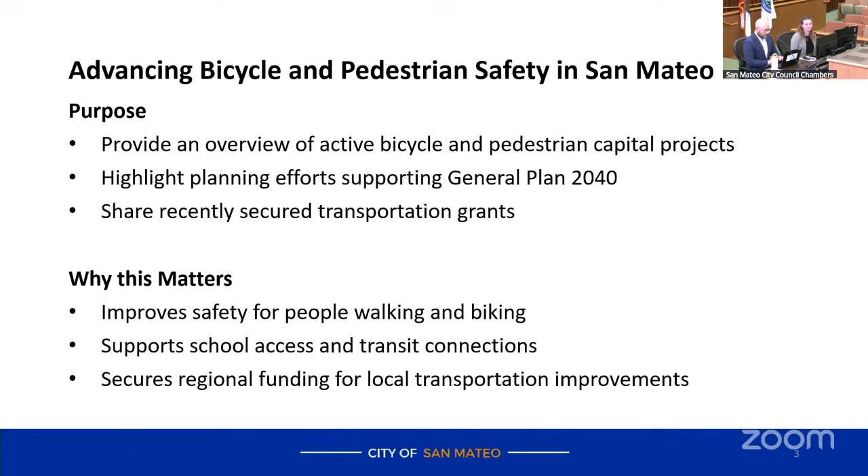First, I'm going to talk about a few of our guiding transportation plans. These really have a goal to reduce severe and fatal crashes while making streets safer and more comfortable for all types of users. These guiding transportation plans inform the city's major transportation capital improvement efforts.

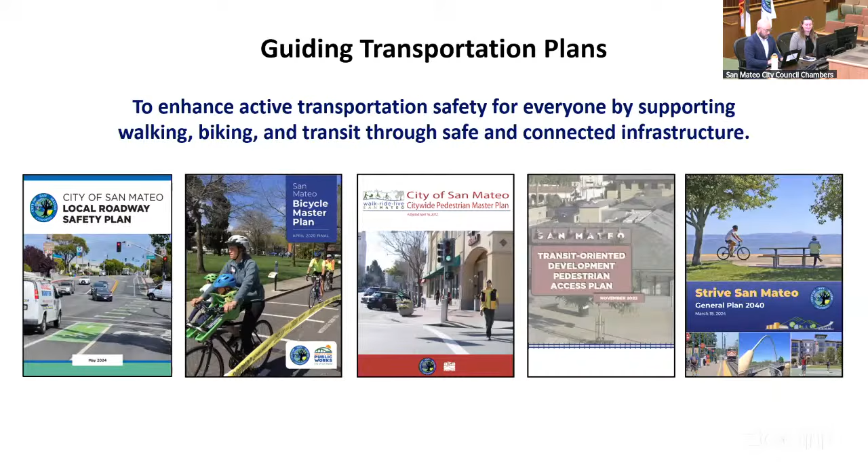Just to go over the ones we have on the screen here: the City of San Mateo Local Roadway Safety Plan, the Bicycle Master Plan, Citywide Pedestrian Master Plan, Transit-Oriented Development Pedestrian Access Plan, as well as the General Plan. Tonight we're really going to highlight the Local Roadway Safety Plan, or LRSP, which establishes a framework and process for identifying, analyzing, and prioritizing roadway safety, as well as the Bicycle Master Plan, which is a vision for expanding and improving the city's bicycle network.

For a little background, we're going to first go over types of bicycle facilities. Class 1 is a shared use path, off-street, designed for both bicyclists and pedestrians—a good example is the Bay Trail. Class 2 are on-street, where bicyclists ride adjacent to vehicles in a designated lane, considered a buffered bike lane if there's horizontal separation provided. An example in San Mateo is Saratoga Avenue.

Third will be bicycle boulevards. These are also on-street; bicyclists share lanes with vehicles, and they're implemented on low speed and low volume streets. They can include traffic calming elements. An example of this is 28th Avenue from Kyne to Saratoga.

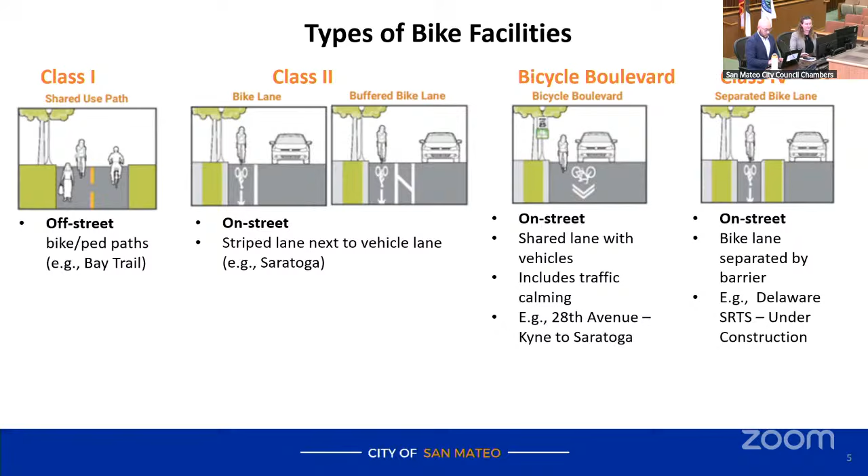And finally, a Class 4 separated bike lane. This is also on-street, but bicyclists are separated by a vertical protection, which could be a curb or flexible delineators. An example of this is the Delaware Safe Routes to School, which is under construction, and we'll talk more about in just a minute.

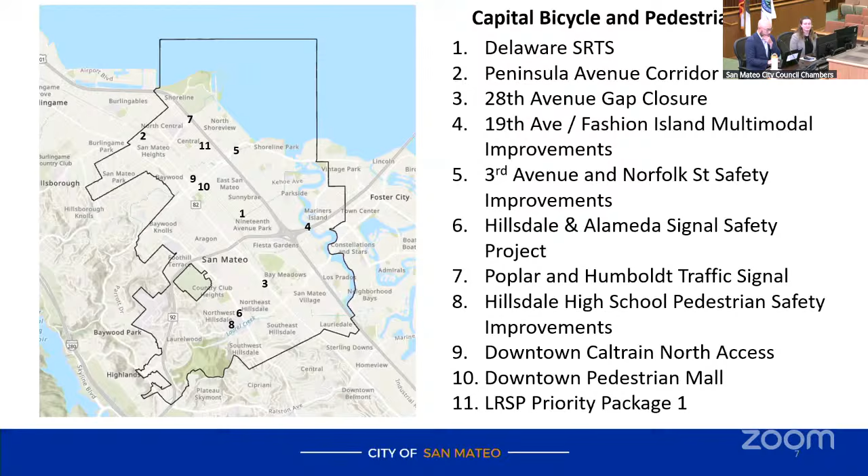Now we're going to move over to capital projects. This is a map overview of capital bicycle and pedestrian projects throughout the city, going from Delaware Safe Routes to School, Peninsula Avenue Corridor, 28th Avenue Gap Closure, 19th Avenue Fashion Island Multimodal Improvements, 3rd Avenue Norfolk street safety improvements, the Hillsdale and Alameda Signal Safety Project, Poplar and Humboldt traffic signal, the Hillsdale High School pedestrian safety improvements, the downtown Caltrain North Access Project, the downtown pedestrian mall, and the Local Roadway Safety priority package 1.

We're going to kick it off with the Delaware Street Safe Routes to School corridor. This goal here is to improve connectivity to existing bike facilities and pedestrian safety at crossings. It's a really key north-south connector for the city, with key access to the event center, Bay Meadows, the commercial corridor, and schools.

Funds were awarded by Cycle 5 of the California Transportation Commission's Active Transportation Program, which enabled the design and construction of a Class 4 separated bike lane and bicycle boulevard. The limits are Delaware Street from 19th Avenue to Pacific Boulevard. It's under City Council Priority A15, as well as high priority project number 55 under the 2020 Bicycle Master Plan.

Outreach was conducted for the project in April, May, and August of 2025 through two community meetings, and in May through a City Council study session and SMC Exposition and Fair Association Board. The design phase was completed in summer 2025, and most recently, Goodfellow Bros was selected as the contractor in late 2025 through a construction bid process. Construction is expected to begin in spring 2026 and be complete later this year.

Next, we're going to talk about pavement management projects that are in progress. I want to note this will be slightly different from before, as we first talk about in-progress projects and then move to completed projects.

First is the pavement management project 4A1. The project began in fall of 2025. It was suspended due to weather, and construction will be completed in late spring 2026.

Fifth Avenue from El Camino to Ellsworth Avenue, as well as Fifth Avenue from South Claremont Street to South Delaware Street, Laurel Avenue from 7th to 9th, 9th Avenue from South Humboldt to South Amphlett, Norfolk Street from Darwin Avenue to Roberta Drive, and Bridgepoint Parkway from Bridgepoint Circle to Bridgepoint Circle are all a Class 2 bike lane. Fifth Avenue is a high priority in the bike master plan, and the rest of the streets are part of our existing network.

A Class 2 buffered bike lane will be on Delaware Street from Birch to Sunnybrae Boulevard, a high priority in the bike master plan. A shared use path is medium to low priority on the bike master plan for Peninsula Avenue from Bayshore to Airport Boulevard. Next, PMP Phase 6B.

Construction is expected this fall. It's a Class 2 bike lane with a high priority in the bike master plan, on West 3rd Avenue from Dartmouth Road to El Camino Real. I have this highlighted over here on the map for 5th Avenue, 9th Avenue, Delaware, Laurel, 3rd Avenue, and 5th.

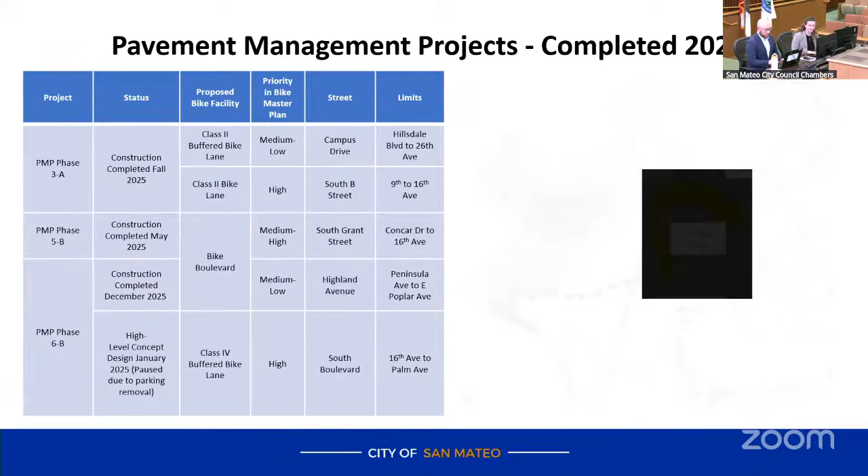Here are the pavement management projects completed in 2025: PMP Phase 3A, 5B, and 6B. Construction was completed in fall 2025 for PMP Phase 3A. For Campus Drive from Hillsdale Boulevard to 26th Avenue, it is a Class 2 buffered bike lane with a medium-low priority in the bike master plan. On South B Street from 9th to 16th Avenue, this is a high priority and it is a Class 2 bike lane.

For Phase 5B, construction was completed in May of 2025. It's a bike boulevard with a medium-high priority in the bike master plan, on South Grant Street from Concar to 16th Avenue. For PMP Phase 6B, construction was completed in December 2025. It has a medium-low priority in the bike master plan, on Highland Avenue from Peninsula Ave to East Poplar Ave.

And finally, the Class 4 buffered bike lane on South Boulevard was paused due to parking removal. There was a high-level concept design in January 2025, but over 20 spaces for parking were expected to be removed, so staff has put this on pause until more expansive outreach can be completed.

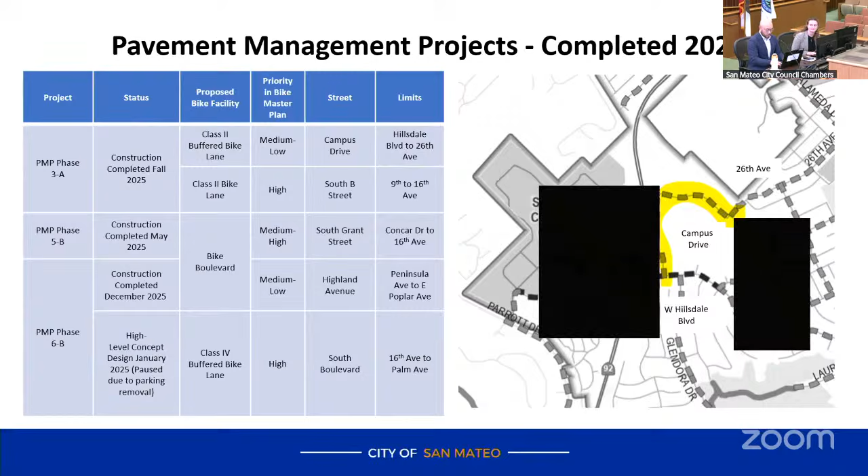Here is Campus Drive, as well as South B Street and South Grant Street for these projects, and Highland Avenue.

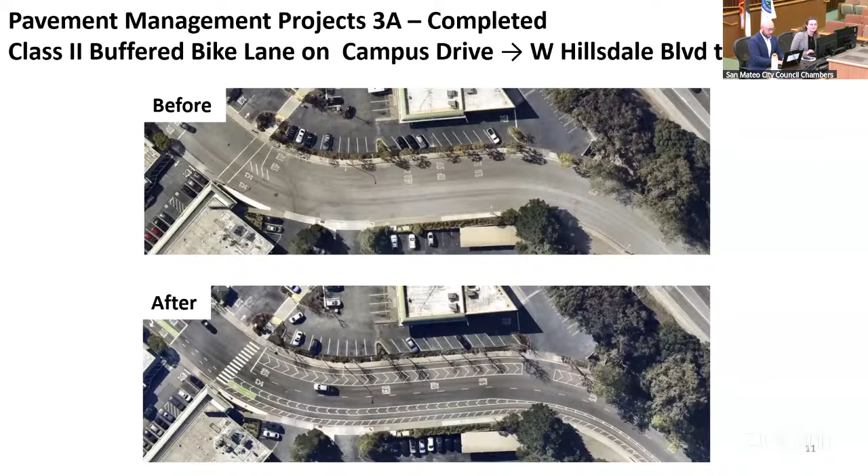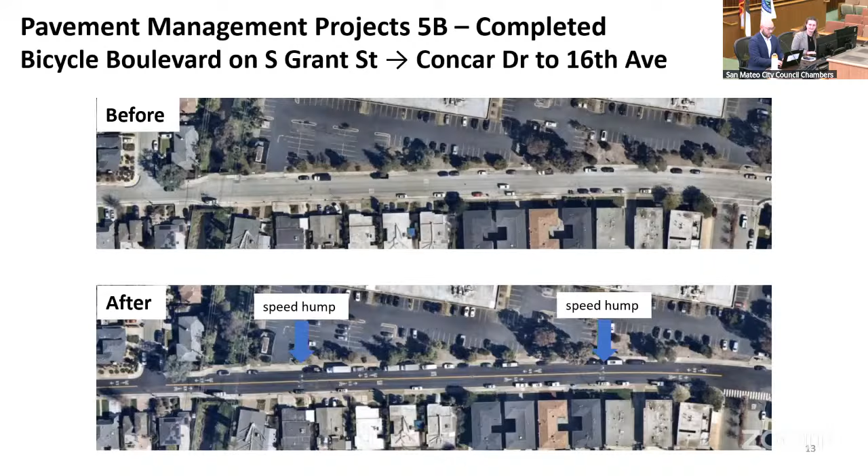Next, we are going to talk about the Peninsula Avenue corridor improvements. Short term, the goal is to refresh roadway markings. Medium term, to work on the Delaware Avenue traffic signal modification project. And long term, to work on the Peninsula Corridor Complete Streets Plan.

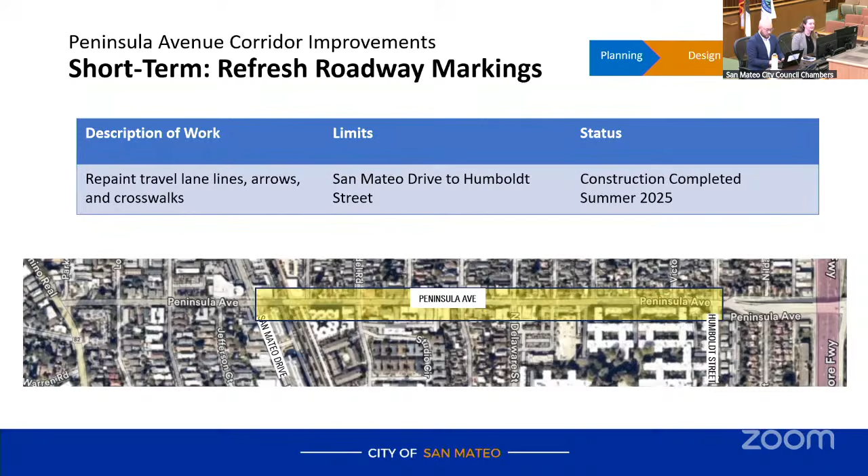The goal here is to improve the corridor across all modes. First, starting with the short term, we'll refresh the roadway markings. The work here is to repaint the travel lane lines, arrows, and crosswalks from San Mateo Drive to Humboldt Street.

Construction was completed for this in summer 2025. Medium term, for the Peninsula Delaware Traffic Signal Project, this project will design and construct short-term intersection improvements from the local roadway safety plan, a high priority project, number 7. The budget is $650,000 to $800,000 of local funds.

Long term, there will be a planning and conceptual phase through the Peninsula Corridor Multimodal Complete Streets Study. This is a partnership with Burlingame and the San Mateo County Transportation Authority. The limits are from Peninsula Avenue to El Camino, and on Peninsula Avenue from El Camino Real to the US 101 overcrossing.

The project is under City Council Priority A15, as well as high priority project number 1 under the 2020 Bicycle Master Plan. The budget is $375,000 of local funds, $245,000 from San Mateo and $130,000 from Burlingame, as well as $1.695 million awarded in grant funds. This project is expected to start in fiscal year 2026-2027.

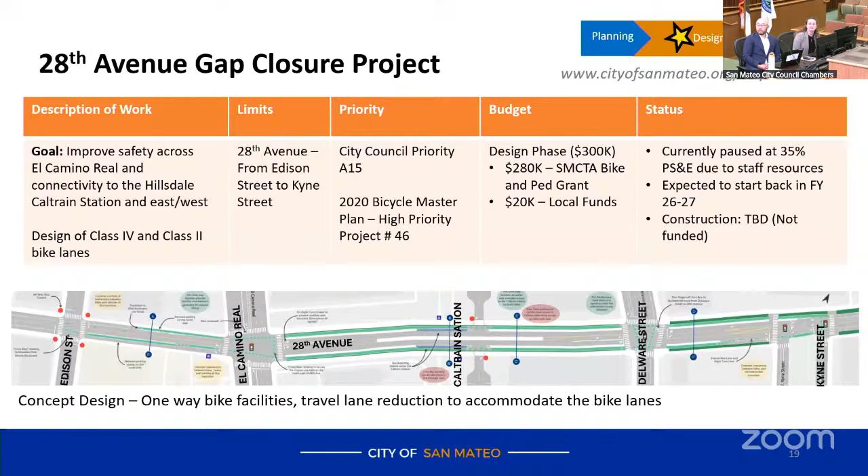The project is currently paused at 35% design due to staff resources. It's expected to start back again in fiscal year 2026-2027, with construction to be determined as it is not funded at this point. The concept design below shows one-way bike facilities, and a travel lane reduction to accommodate the bike lanes.

Here is the 19th Avenue Fashion Island Multimodal Improvement Project. The goal for this project is to improve congestion, safety, and access for all road users, whether that be walking, biking, transit, or driving. It will design and construct a Class 4 bikeway and pedestrian crossing improvements, and it is a joint project with the SMCTA and Samtrans.

The western limit is 19th Avenue and Pacific Boulevard. The eastern limit is Fashion Island and Mariners Island Boulevard. It is also under City Council Priority A15, as well as a medium-high priority, number 60 under the 2020 Bike Master Plan. The design phase is estimated at about $1.8 million.

$1.4 million being through the SMCTA Bike and Pedestrian Grant, and $0.4 million in local funds, as well as a construction phase of about $26 million, with $26 million coming from grants and $0.61 million coming from local funds. Community meetings happened in July and November, with 2 upcoming meetings, one on April 7th in person and one on April 14th virtually.

The design phase is estimated to be complete in fall/winter 2026, with construction starting in spring 2027.

Here we have the 3rd Avenue and Norfolk Street intersection safety improvements. The goal for this project is to improve pedestrian and bicyclist safety access and optimize timing through the intersection. The project designs and constructs a Class 4 bike facility and improves pedestrian crossings.

The southern limit is San Mateo Creek Bicycle Path, and the northern limit is the 3rd Avenue and Norfolk Street intersection. This was under City Council Priority A15, a medium-high priority project under the Bike Master Plan, and it also responds to safety concerns from the community. The design phase was completed in winter 2024. Construction started in spring of 2025 and is expected to end at the end of this month.

Next, we're going to talk about the Hillsdale Boulevard and Alameda de las Pulgas traffic signal safety project. The goal here is to optimize safety for all modes in the intersection, as well as design and construct a new traffic signal and protected intersection for people going to key destinations, including Hillsdale High School, Abbott Middle School, Hillsdale Branch Library, and Laurel Elementary.

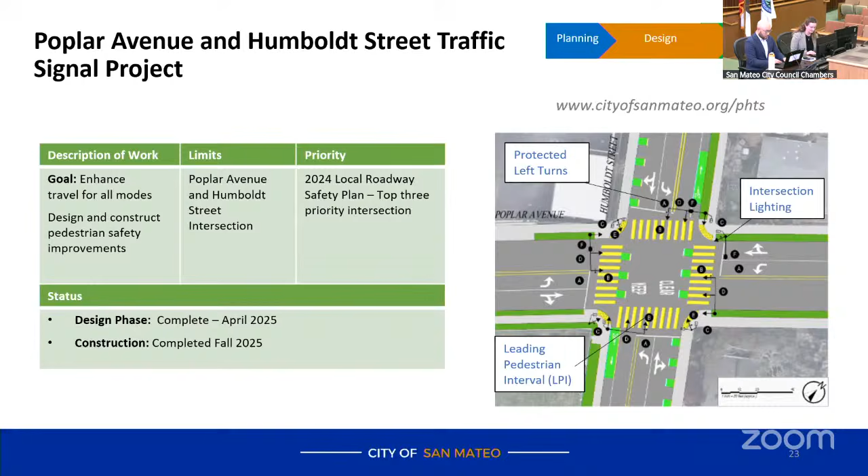Here we have the Hillsdale High School 31st Avenue Pedestrian Safety Improvement Project, with the goal to enhance pedestrian safety and accessibility, especially for Hillsdale High School students and staff. The project designs pedestrian safety improvements and a protected intersection at Alameda de las Pulgas. The limits are 31st Avenue from Del Monte Street to Alameda de las Pulgas.

Next, we have the downtown Caltrain Station North Access Project. The goal here is to improve bike and pedestrian access at the northeast side of the Caltrain station. The project will design a new Caltrain entrance at Railroad and Cypress Avenue and improve the entrance on Cypress Avenue. The limits are on Cypress Avenue and North Claremont Street to the northbound platform at the Caltrain station.

It is under the 2022 Transit Oriented Development Pedestrian Access Plan Priority Project DT31. The project kicked off in May of 2025. The design is currently at 35% with 3 design alternatives and outreach, and estimated completion is at the end of 2026.

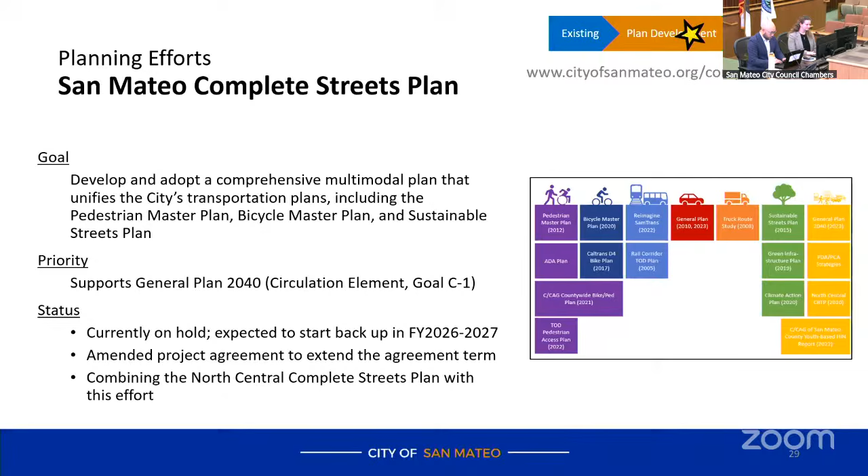Next, we will talk about the Humboldt Bike Lanes Alternative projects. The goal here was to explore the feasibility for a bike boulevard on Idaho and Fremont streets as an alternative to the bike lanes on Humboldt Street from Indian to 2nd Avenue, and to improve the street lighting.

The direction from the City Council in February 2026 was to look into Humboldt speed calming, Humboldt street lighting, a permit program, exploring additional enforcement for North Central, exploring a rideshare program for Humboldt Street, applying initiative to future bike boulevard projects, and exploring a one-way feasibility on Humboldt Street.

Next, we're going to talk about AB 413 daylighting efforts. The goal here is to prevent prohibited parking on the approach side of crosswalks to increase unobstructed sightlines, reduce potential conflicts, and improve safety.

The effort includes completing red curb painting. This was done around school zones for Assembly Bill AB 413, and the key school zones are complete. Estimated in spring of 2026, red curb painting will begin in key park and downtown areas as well.

Finally, we're going to go into recently awarded grants. First, the MTC Housing Incentive Pool Grant. This is awarded to the top 15 jurisdictions with the most affordable units between 2018 and 2022, and transportation funds are used to incentivize affordable housing. Funds from this are going to be used for 4 Tier 1 local priority intersections under the LRSP, and the grant amount was $959,000 for design and construction. This is a project we are currently working on.

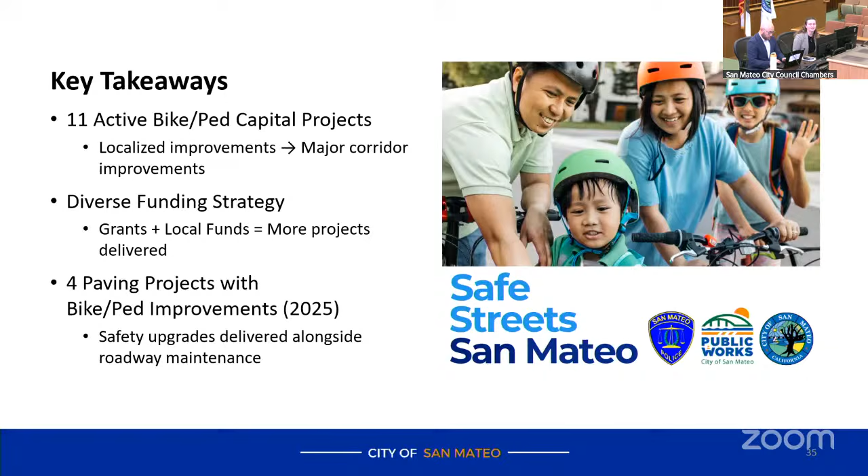Key takeaways: the city currently has 11 active bike and pedestrian capital projects, looking at localized improvements all the way to corridor improvements of all sizes. The city also uses a diverse funding strategy, looking at not just local funds but grants so we can deliver more projects. And 4 paving projects were completed in 2025, with safety upgrades delivered alongside roadway maintenance where feasible to help get more projects out the door. So thank you.

Thank you. I think you're officially a San Mateo expert.

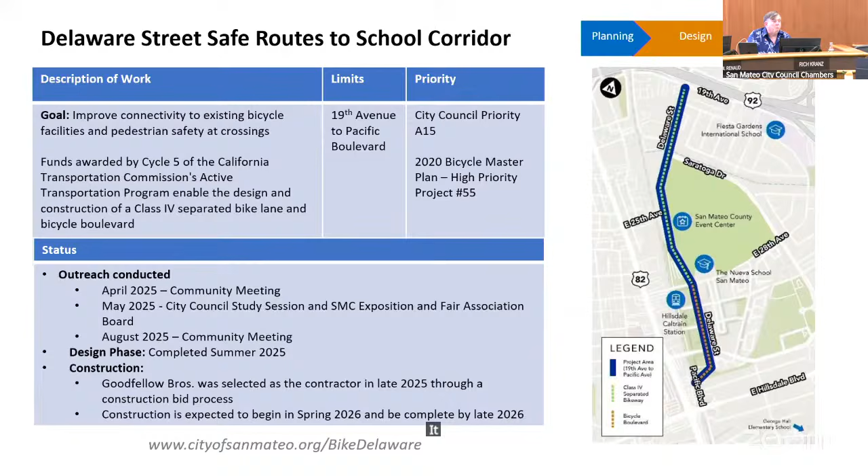So a couple of things. Delaware, Safe Streets, I can do this. I noticed on the slide, I kind of got confused between the slide numbers, it was towards the beginning. So it was the completed Safe Streets project, the completed, if you could share your screen with us, I'll let you know when we get there. I think that'll work. Okay, go back one. No, forward one. It was the pavement. Right. There you go.

So I noticed that, and it's just a question, that Fashion Island Boulevard over 101, there's issues going on there with subsidence. Also noticing that 19th over the Marina Lagoon is starting to develop symptomatically the same problems. It's an abrupt change in height between the roadbed and the bridge. So is that a work in progress on a different front, or is that something we're going to job out, have an outside contractor do? Where do we sit with that?

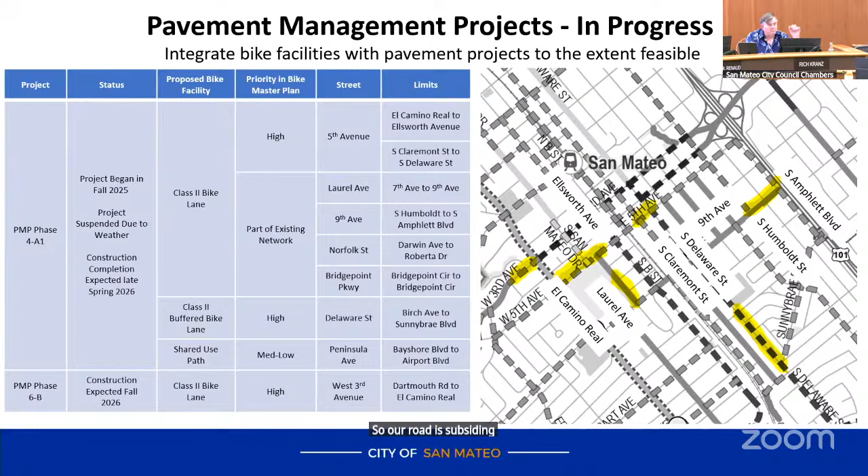Just to clarify, are you talking about the section over Mariners Bridge at 19th Avenue? Yeah, so it's Mariners Island Boulevard over 101. It's a Caltrans bridge, but it's our road, and we have to fix the approach. So our road is subsiding. The bridge is staying forever where it is. So wondering where we're at with that. You did a mitigation project, and it's so far pretty good. But I was chatting with Matt, and apparently there's going to be a bigger, more expanded project going on.

Yeah, through the chair, we don't currently have any funding for the longer term projects. So right now it's still on the hold list of things, but we don't have funding for that. Okay, and is the 19th Avenue over the Lagoon Bridge on your radar also? I assume that we'll be looking at that as part of the overall design for the 19th Avenue Fashion Island Boulevard project. Got it, okay.

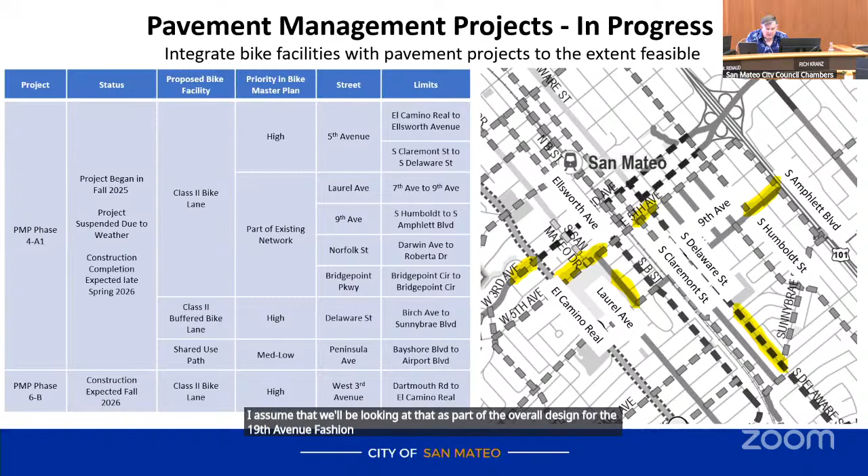A couple of slides later, we saw a couple on Peninsula Avenue. Can you enlighten us about scrambles? Does it make sense to put scrambles in on some of these heavily used intersections that are busy? Yeah, so we look at volume counts, and honestly, in the city of San Mateo, we have a couple of scrambles.

I think if you go to B Street, you will see some of our first scrambles in our city. The scramble ultimately has a pedestrian exclusive phase, but you don't have to go east-west or north-south—you can go diagonal. As part of the Delaware project, we are implementing a scramble as well on 28th and Delaware, and ultimately pedestrian volume will dictate that.

Is the button push the driver on that, or does it happen every time there's a cycle of the lights? It depends. In our downtown right now, it is ultimately on recall, so it will happen on every cycle. In areas that have a bit more nuanced demand, it will be on demand.

On demand, okay. Speed humps—are they the new modern ones that are more gradual, or the old-fashioned ones that are shocking? I think there is a balance of both. I don't exactly know what shocking is, but I'd say the speed bumps we have are intended to slow vehicle speeds.

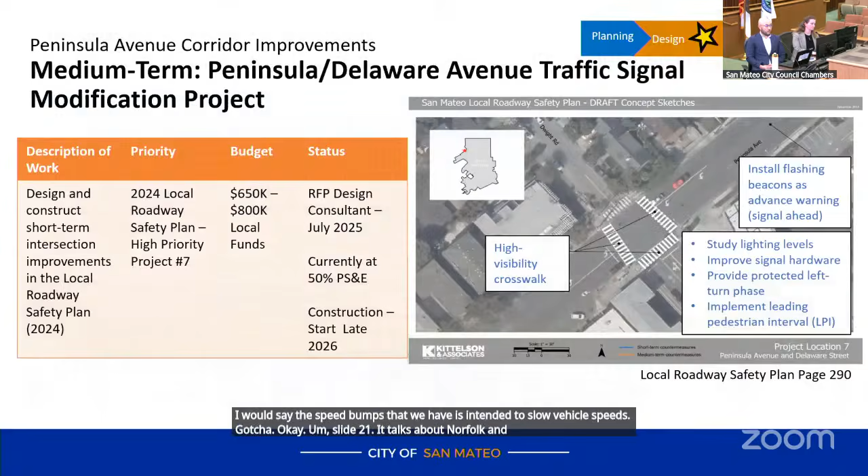Slide 21 talks about Norfolk and Third. There's an area there where I'm getting feedback from folks—if you look at San Mateo Creek Trail, coming off Third you make the left turn onto Norfolk, and people are using that to make a U-turn. Does it not have a median for a reason, or are people supposed to make U-turns there? We will double check, I don't think the U-turn is technically allowed there. The project right now is not completed, so there may be punch list items we're still looking into. I think folks are getting creative when they realize they went the wrong way.

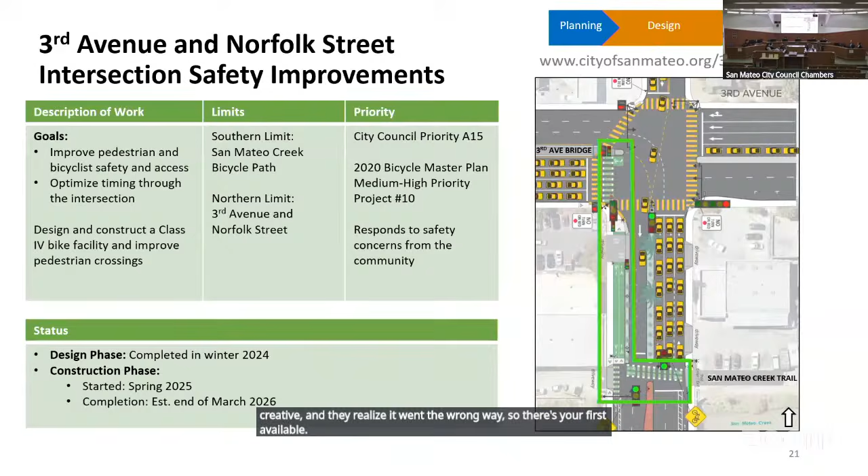For clarification, this project ultimately is to provide a new ingress and egress at that point. On the northeast side of the station, we're not necessarily installing bike lanes. Just confirming we're talking about the same side, the northeast side, yes.

So once people exit the train station, will they have a clear, safe path to get to a more well-traveled path like Humboldt? Yes, the immediately adjacent street, Cypress, is going to be the main corridor. We will install crosswalks and look at potentially doing a road diet on that street to facilitate vehicle movements. But as mentioned, we're at 35% design and still looking at circulation feasibility.

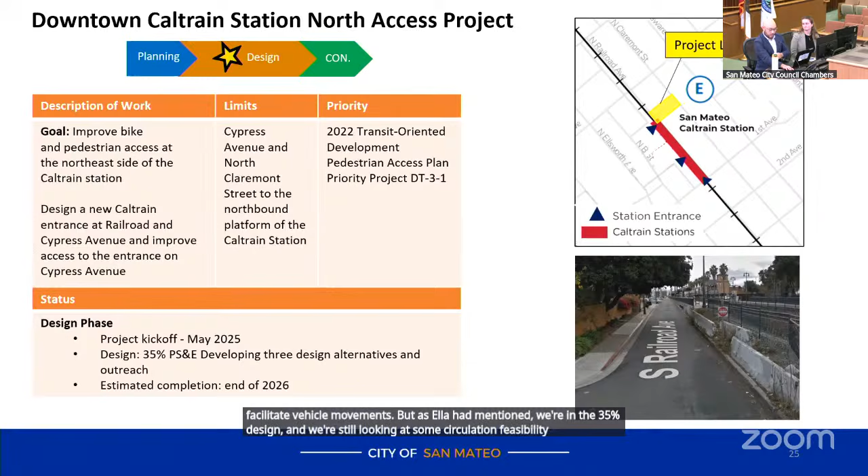Hillsdale Franklin, we have to talk about this. Great project, love what you're doing—it's really going to make it a more vibrant access with Whole Foods and that whole part of the world. Any thought to a bike bridge? Where specifically? It parallels Hillsdale, a bicycle bridge that would cross over 101.

Yes, so wow, this is a long time ago—in the early 2000s, there was a feasibility study done to look at a bike bridge, and there are 4 landings, meaning 4 points where the bridge ultimately touches down: 2 on the Whole Foods side, and 2 that are east of US 101. That project actually paused in its PAED phase due to high constructability costs, as well as delivery costs.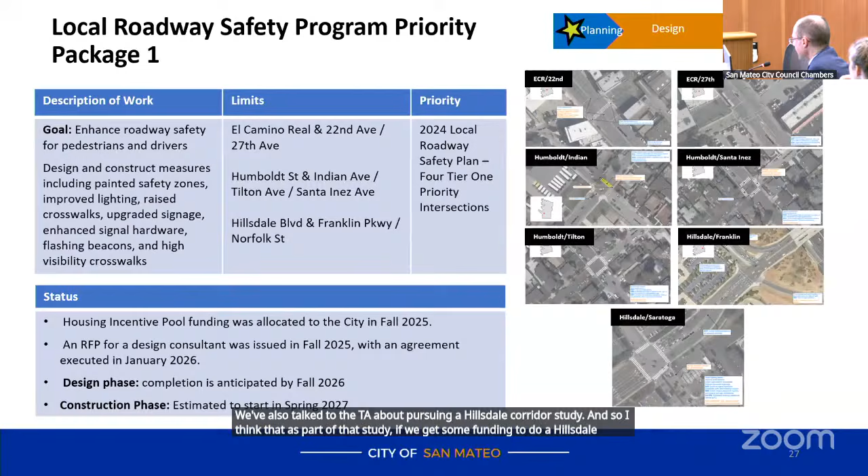So I think it opened our eyes that there's more feasibility in getting big dollar amounts for bike crossing. But we've also talked to the TA about pursuing a Hillsdale corridor study. As part of that study, if we get some funding, we would look again at the feasibility of some sort of separated bike crossing, whether that would be an entirely separate bike bridge or some sort of separated bike facility attached to the existing crossing over 101. That remains to be seen, but it's still on our radar. It's just something that the original design at this point, we'd have to study whether or not we want to continue to go forward with that or something new.

So could we slim down that original design and make it more cost effective? We could look at that as well. I think that would be something we'd want to look at with the overall corridor study.

Sure. So, because if it's technically challenging now, as the population increases and funding gets more tight, it's going to be even worse. This is one of the things I get emails almost weekly from folks, and I'm just trying to give it some air, let them know that we're advocating for them. Humboldt, the permit program.

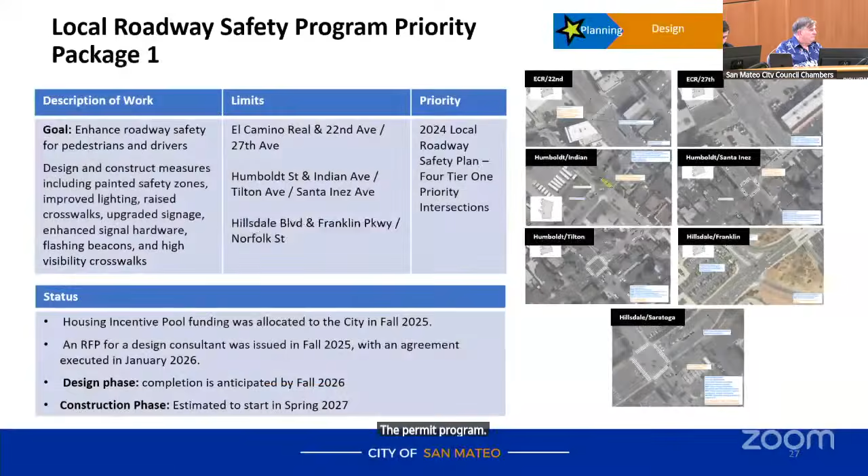Well, the people who want to park there live on Humboldt. The people from Mariners Island are not trying to park over there. So it's just a quick point of reference.

And the last thing is slide 33, recently awarded Fashion Island Norfolk. What's that? I think it's the slide, yeah. Talk to me about what's that about? I think you had it actually one back. Fashion Island Boulevard Norfolk design. Does that mean it's in the design phase? And what does that look like?

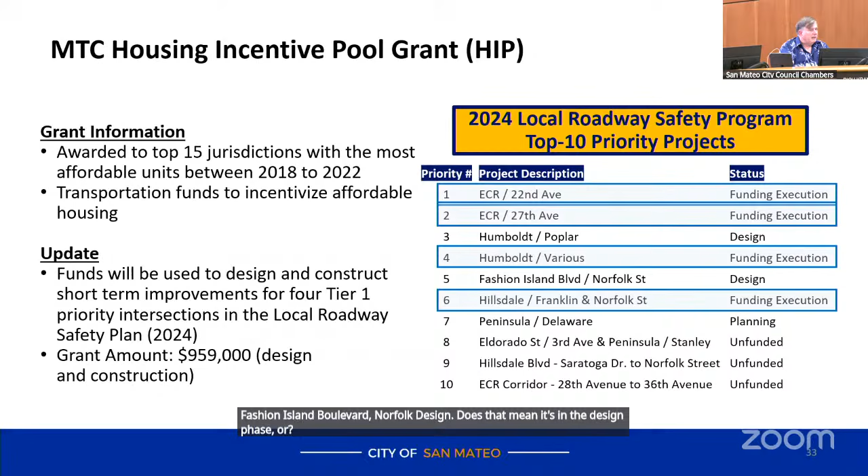That is correct. That is ultimately the intersection of Fashion Island and Norfolk. And that has been identified in our local roadway safety plan as one of the top 10 intersection locations. We were able to include that scope of pedestrian improvements for safety as well as bicyclists in the 19th Avenue Fashion Island multimodal project. So that is currently in design. Sounds like a plan.

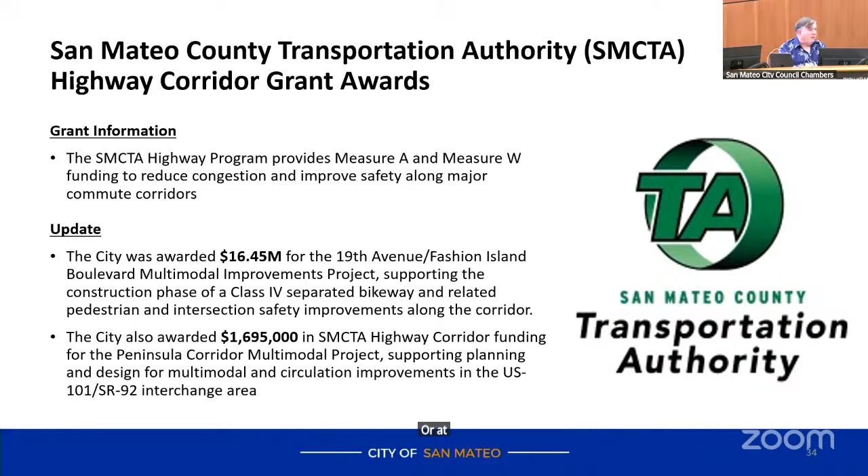I think I'm done. We're going to talk about the multimodal 19th later or at all today, or is this now the time to talk about it? You are free to talk about any projects in the presentation. Well, I think I'm on topic.

I think, through the chair, that we are looking at potentially bringing that project back specifically for discussion at the commission and then bringing it back to council. Why don't we wait until maybe a couple more sessions with the residents? I think that might be more appropriate. Yes, let's do that. Okay, thank you. Great, thank you.

Commissioner Narita, did you want to go next? Sure, thanks so much, and nice to meet you, Ella. Welcome. Okay, so this was a big update, probably because there was a backlog I'm sensing, so there was a lot of energy and a lot of work. Thank you so much for all of that. It was incredibly comprehensive, and my brain's a little tired from listening to it. So I apologize if some of my questions are a little basic, because I genuinely can't remember quite everything that was presented.

So just some real basic questions. Fiscal year starts July 1, 2026. Is that correct, Jay? That is correct. So we're currently in 25, 26.

And then, when will the additional two of the three hires happen? Are there two more hires coming, or did they already occur? Those hires, we have issued a requisition. I'm looking at Kathleen, but yes, we are in the pipeline and looking forward to the actual recruitment. So I'm sensing, with some of the themes of capacity constraints as presented on the slides, we're literally waiting on those two hires to do or redistribute some of the work as articulated in the slides. Is that accurate? That is accurate. Okay, great.

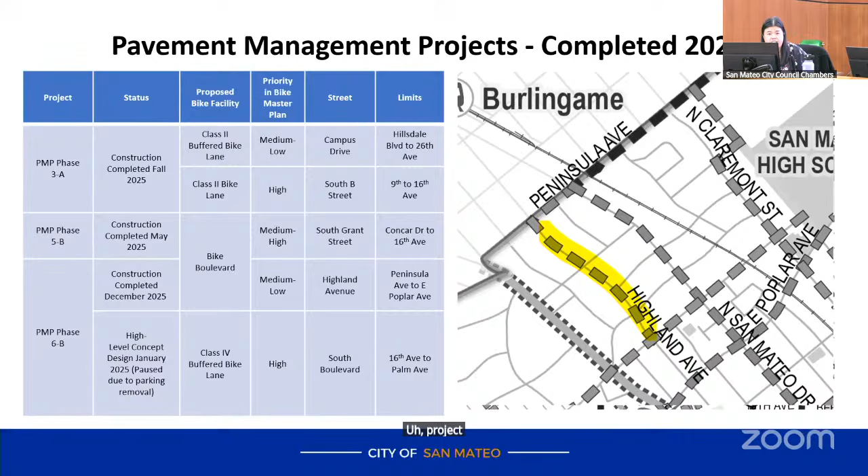And so Ella, I was very impressed with the Peninsula, the Burlingame San Mateo project. That was really exciting. I've been on this soapbox of needing to integrate and coordinate across cities, so that was really wonderful to hear. Could I hear a little bit more? I don't quite understand—is there like multiple parts of this that are San Mateo and other parts are Burlingame, and that's why we need to coordinate on it? Is it that we want to have a continuous flow design?

Oh, the presentation's gone. Okay, there it is. Could you just walk me through what does that coordination with the city of Burlingame look like? How does that coordination happen? What are you guys talking about, stuff like that? I'll go ahead and take this one as well, as Ella is getting up to speed.

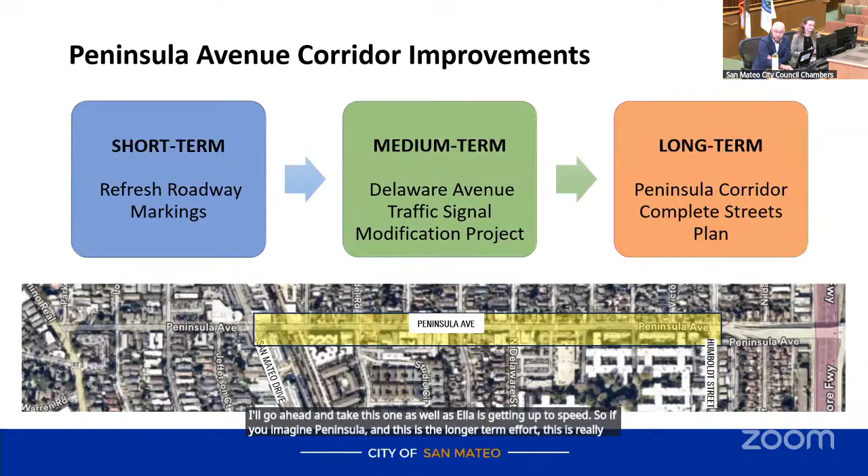So if you imagine Peninsula, this is the longer term effort—a multimodal complete street. We are planning and revamping the whole entire corridor to include multiple modes. The center line, roughly speaking—I don't want to get too technical—but if you look at the northern portion, that's Burlingame right-of-way, and the southern portion is San Mateo right-of-way. So we are looking—like a zipper. Yes, exactly. So we need to include our partner agency in Burlingame. This is one of the priorities, where we're partnering up to revamp the corridor. I want to note this corridor is identified as the number one priority in the entire bicycle master plan. Historically, having two cities is difficult, but this is one where we both view as a priority, and we're going to make it work.

That's great. Do you think this project will be coming to the commission during the design phase? We haven't started design yet, right? We have not started design. We will be engaging in our $1.695 million.

It's a planning effort, and the commission will most definitely be seeing this project in the future. Great, that's very exciting.

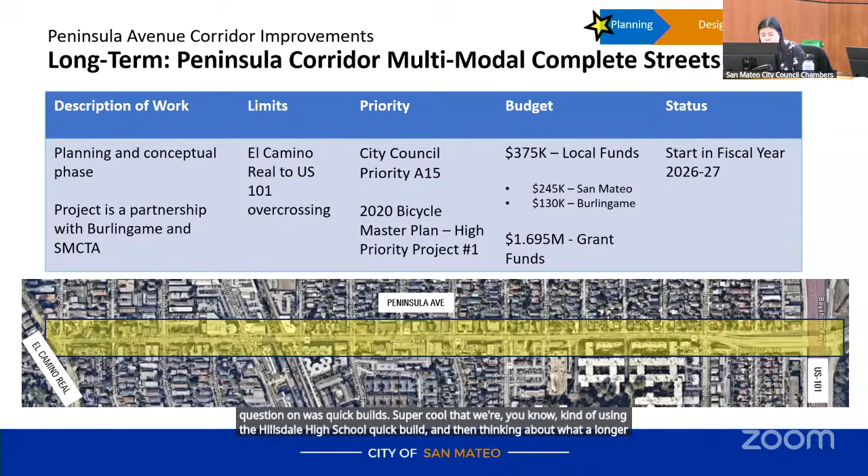The other thing I had a question on was quick builds. Super cool that we're kind of using the Hillsdale High School quick build and then thinking about what a longer term design would be. Does the city foresee other quick build projects potentially with that kind of experimentation in some of the other intersections and other streets for bike ped?

Yes. Do you know which ones yet? We have a list currently, and there's about a dozen projects in our quick build program. The quick build program is intended to ultimately improve safety really fast, so instead of going through our normal capital project process that easily takes 18 months, there's a significantly truncated duration for those projects.

Painted curb extensions are a type of improvement. Rectangular rapid flashing beacons are one. New crosswalks, lighting improvements — these more quick-hitting projects are the ones on the list. We didn't include the holistic list here, but there are over a dozen projects currently in the quick build program.

That's awesome. I think for a future presentation, if you're able to just take some photos of them, I think that would be really inspiring for the public, because that's the sort of stuff people feel is very responsive to their requests or when they call in or express concerns. From a community engagement standpoint, having that in the record is really helpful. And just some comments on the presentation — I really appreciated the aerial shots of the bike lanes. I don't think we've quite seen that in that way before, so thank you, that was really inspiring.

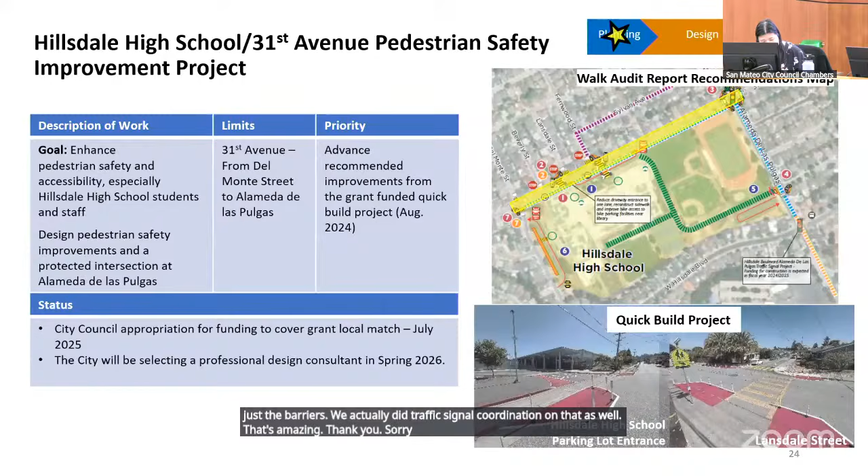That's amazing, thank you. Sorry, last question I realized - on Humboldt, the report out from the February council meeting, I was really inspired by the conversation about potentially exploring a feasibility study on Humboldt for a one-way. Do you have a sense of where that would go in the queue of the various priorities and projects that Public Works has?

I don't know exactly - we just went over our list and it's really long. But I can tell you Humboldt is a priority project. The directive from City Council from February 2026, all of those are priority items at the moment. We're meeting on a weekly basis to execute them. City Council directed us to proceed forward with speed calming, in addition to what was provided in our LRSP Priority Package 1 project. We are also going to update lighting on Humboldt, the entire corridor all the way from 5th to Peninsula.

We are immediately exploring a Humboldt-specific permit program, so we're looking into that. We're getting data, we're going to engage the community there that's directly affected, and then ultimately bring something back to City Council for approval. We have been coordinating with PD to explore additional enforcement in the greater North Central community. We have been in discussions about rideshare programs for Humboldt - the thought is, if you can't park directly in front of your street, we want to see if there are ways to increase potentially shuttle service to have that be a mechanism to get to your home.

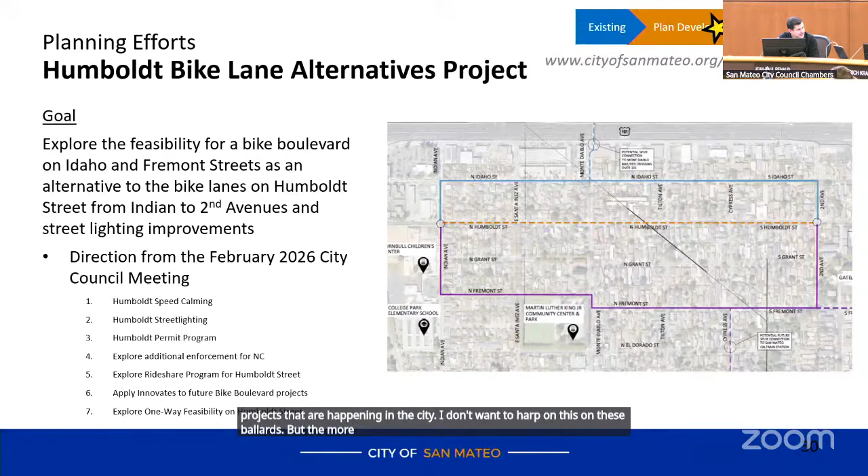Really quick, one question, thank you for the presentation - it was great, and it's really nice to see the holistic projects happening in the city. I don't want to harp on these bollards, but the more questions I have - for example, you just said they're movable, but you need a dolly to do it, so it's not really for an emergency. If there's an emergency, you don't have a dolly around. So I guess my question is...

They're permanent - that's the current iteration of what we're doing. There's always the possibility in the future that we may ultimately go forward with hydraulic barriers, but that was a significant cost impact, so these were more affordable.

Just to clarify in terms of the movability, we did install bike lockers down there directly adjacent to where these barriers are, so there is a dolly right there. But in an emergency situation, it's not likely that public safety is going to go get a dolly and move that - that's why we've worked with them on accessing it through 2nd Avenue. The dolly is readily available to move them, but it does take time - you have to move each one individually.

So I guess this is kind of a random thought. When you see other cities that have pedestrian walking infrastructure, like Mountain View, for example - this is an infrastructure and sustainability commission, not just sustainability - I'd like to remind us that there are other ways to block off streets, like huge planter boxes that bring in nature, have native plants, welcome a little biodiversity, and do the same job. They would be much prettier.

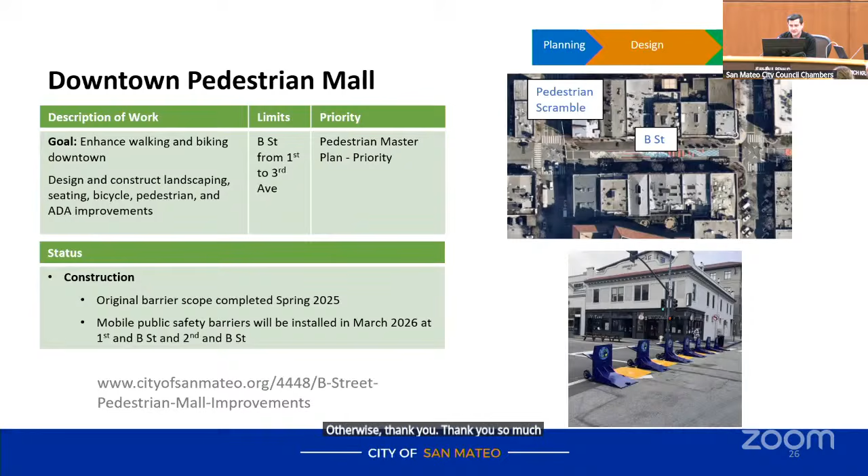Oh, go ahead, can I give a quick piece of information? Sure, thank you so much. So I did a quick search on their website.

The bollards conform to ASTM - American Society for Testing and Materials - standards, to stop a 15,000-pound vehicle doing 30 miles an hour, with no penetration between 23.1 and 98.4 feet. So within that radius, nothing's going to get by. They apparently clip into the ground. If you look at the picture of the bollard, it's a wedge design, meant to lift the car up in the air and stop it.

When you unclip it, according to the website, the wheels on the back form the dolly. So if the fire department has a key for it, or however they unclip it off the ground, they move it out of the clips and roll it out of the way to get the fire trucks in - I think that's what's going on. But it seems to be somewhat robust. If you're interested, I could send you the website, but it's public knowledge, it's right there. Thank you.

Youth commissioners, would you like to make some comment? Commissioner Singh? Okay, I just have one question. Thank you, Ms. Ella, for presenting - lots of details, lots of numbers.

But concerning 19th Avenue and Fashion Island, I noticed that in terms of community meetings, there were 2 held last year and only 1 planned for this year before the design phase is expected to be finalized. Is there a specific reason for that, or is it based on how many people turned out to the last meeting? Yeah, so really good question.

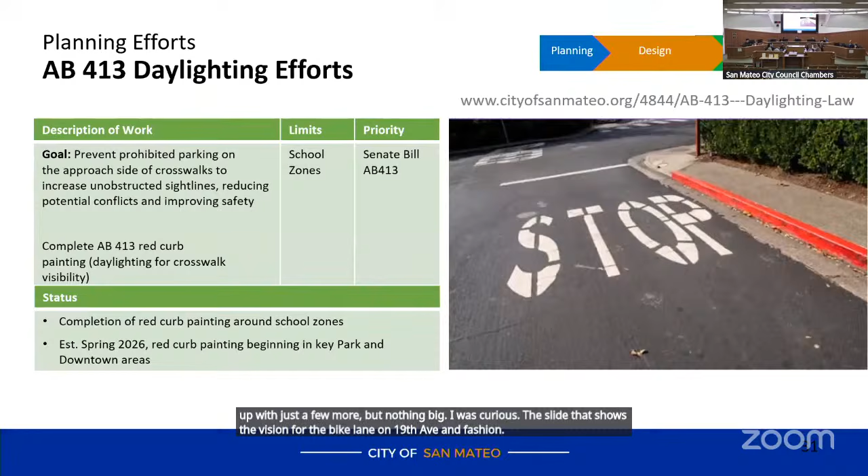Yes, really good question. So there are a lot of funding sources in this project, and ultimately this entire project exceeds $28 million. As of this moment, out of the 28.5, about 19 to 19.5 million of it is already secured.

So a long way coming. There are ultimately, I think, over 11 different funding agencies supporting this project. By far the most diverse funding portfolio project that I have worked on. For comparison, the $200 million grade separation project had about 5 funding sources, so this $30 million project has close to a dozen.

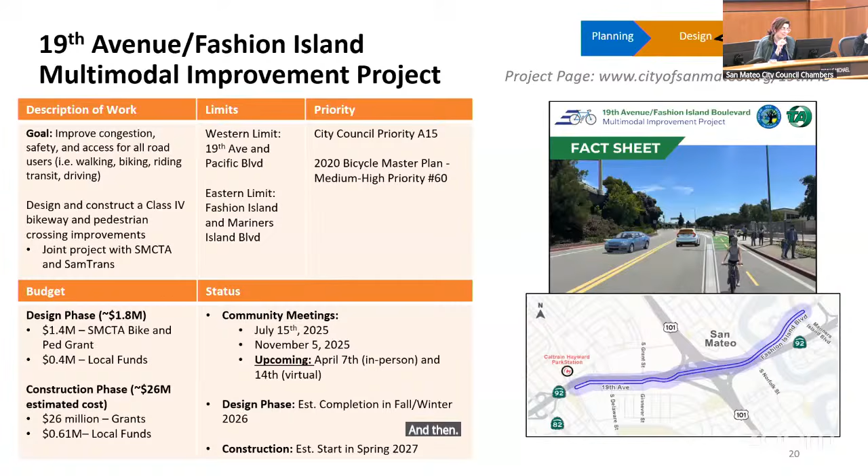Yeah, so previously there were wooden planter boxes - the outside ones were stationary, the inside ones were on rollers and movable. They weren't crash rated, so we replaced those with crash rated barriers. We had considered possibly using the two together, but we're concerned about impairing the functionality of the mobile barriers. We want to make sure these work as intended, so we can't really stack the two together. But we do still have the vegetated planters right now at our courtyard, decorating alongside our warehouse.

But they do still exist at Second Avenue, the same planters. Okay, thank you. Well, I'll make my judgment of how they look when I actually walk down the area.

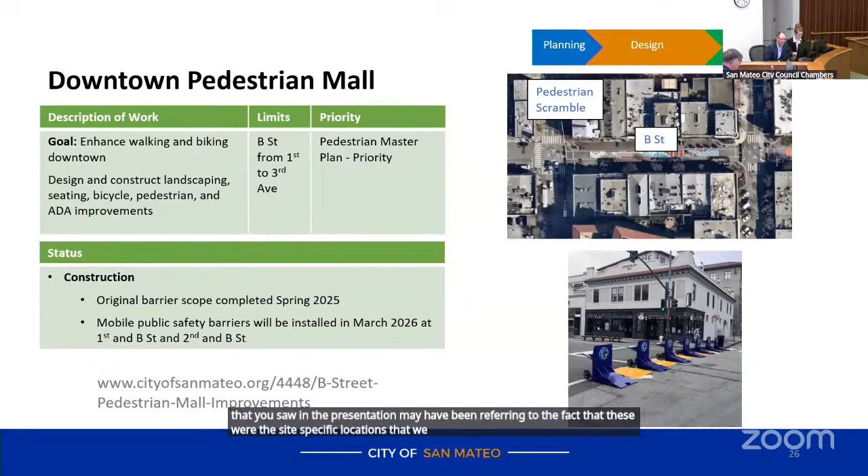So the reference you saw in the presentation may have been referring to the fact that these were the site-specific locations we recommended improvements for in the LRSP, versus citywide systemic improvements like no right turn on red and other citywide measures. So that's my best assessment of what the tiers reference.

But when I do a search for 'tier,' it doesn't even come up in the document. Got it, okay. We can do a double check, and if we get a different answer, we'll get back to you. Thank you, because I didn't remember tiers either, that's why I was confused about what was going on.

Matt, do you have any announcements? Just in terms of a crystal ball for future meetings, I don't believe we have anything currently scheduled for the April meeting, so we'll continue to look at whether something needs to come to the commission, or consider canceling that. Then May is the date we're looking at for potentially bringing back the 19th Avenue Fashion Island Boulevard project. I believe we also have an item from Andrea on the sustainability side, possibly the climate action plan. So that's April and May for future meeting topics.

I also believe the clerk let me know that Commissioners Michael and Robbins are terming out at the end of June, so there will be a process to recruit new commissioners. I also didn't realize the youth commissioners are on 1-year terms, and I believe their time is also up around June. So we'll be going through some of those changes, along with chair and vice chair nominations and elections in the June timeframe. That's all I have.